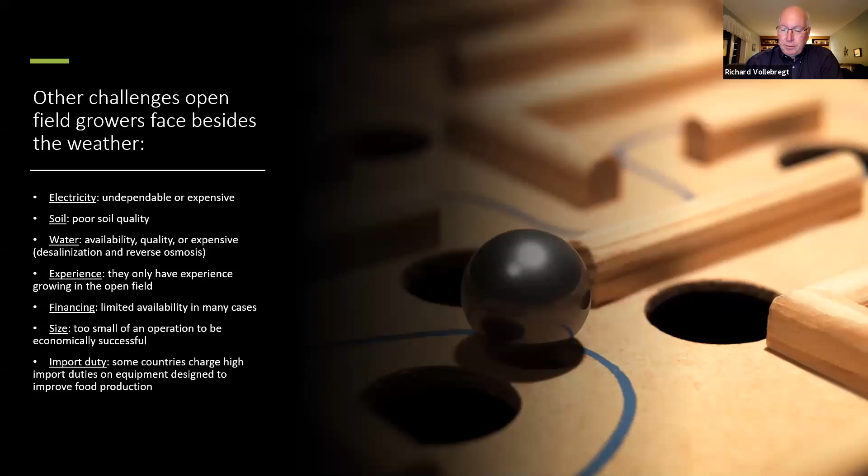Import duty. Some countries charge high import duties on equipment designed to improve food production, and this is a major issue in countries like India, for example, where the growers are looking for technology to improve food production, but their cost of importation is high, adding to the total capital investment and cash outlay.

So now we're going to talk a little bit about protected cultivation. And growers in warm and hot climates are utilizing many different types of production systems with some form of crop protection covering. So we're going to do a quick overview of the advantages and disadvantages of the various production systems using covers.

So when I think of net houses and I look at where they're installed, net houses are great for extending the season past what the open field can do, because they will protect the crops from the direct sunlight and keep the insects away. So if your normal open field harvest will be stopping in late February, for example, with a net house, you can extend the season into end of April, maybe early May. And you'll get an increased yield in terms of the number of fruit, but your pack out will go up.

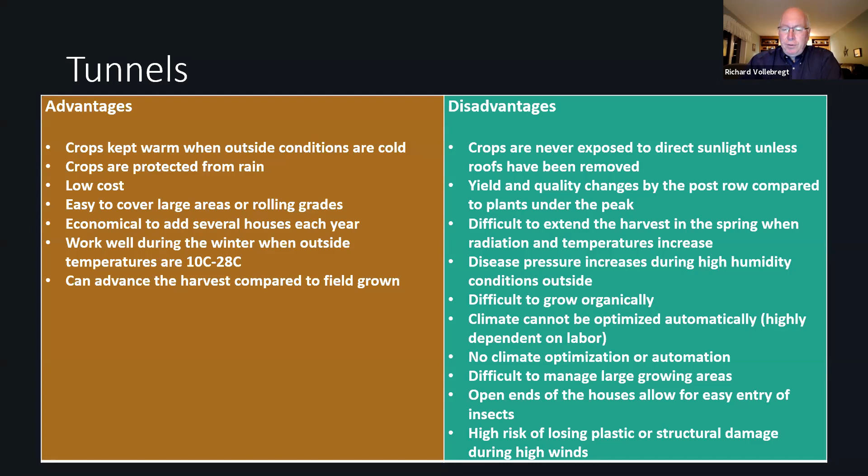So the next one is a naturally ventilated greenhouse. And in some countries, they refer to them as gutter-connected greenhouses. In other places, they refer to them as multi-span. But the key is that you're creating openings in the roof to allow for air exchange. And again, there's a set of advantages and disadvantages.

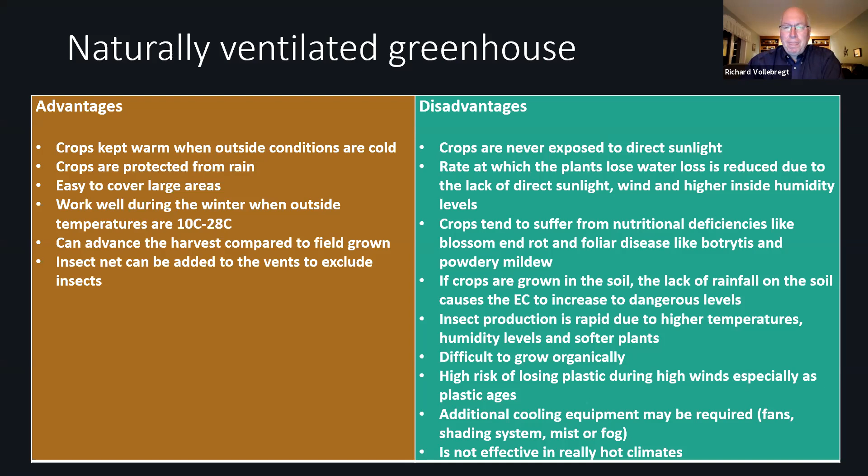So with a naturally ventilated greenhouse, they're effective for helping the production in the wintertime if you're in a high radiation zone. But again, their limiting factor is they're very difficult to cool in a hot, sunny climate. And so when people try a naturally ventilated greenhouse, they find they quickly have to add shading systems, misting systems, or things like that to further try to cool the greenhouse. And so a naturally ventilated greenhouse is really designed to make it warmer. But if you're already in a warm climate, you're making warm conditions now hot, and hot conditions really hot.

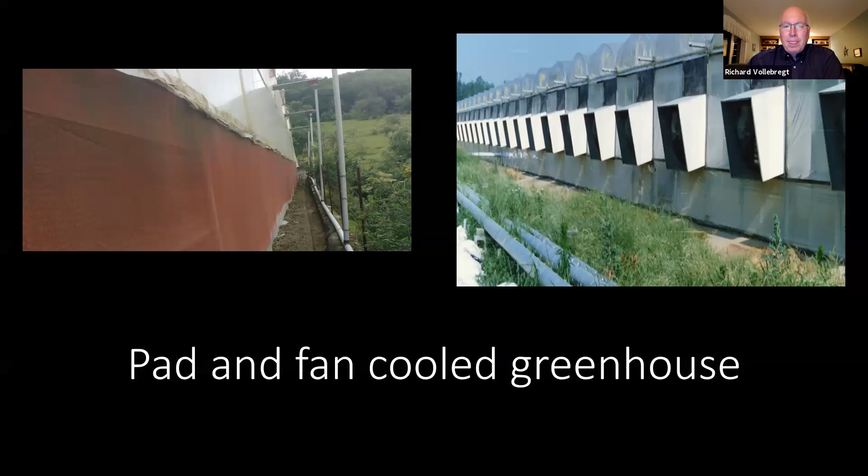So to try to cool, growers are using pad and fan cooled greenhouses. Fans on one end, cooling pads on the other. And again, they come with their own set of advantages and disadvantages.

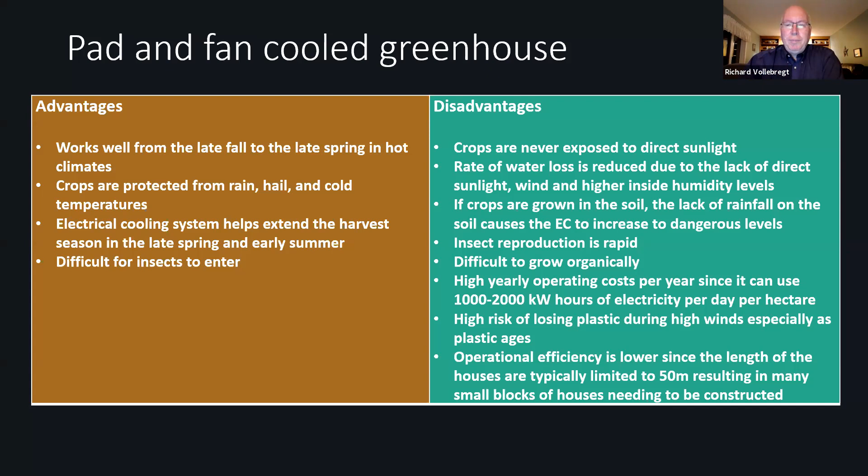So one of the biggest challenges with pad and fan greenhouses is that they use a lot of water and a lot of electricity for cooling. And so when you're in a hot climate, a pad and fan greenhouse will have the clear roof make it warmer, and now you're using more water and more electricity to cool. And one of the big problems is you're limited to 50 meters approximately from fan to cooling pad, which means you have to build many blocks of small houses.

So what are the key learnings about the conventional production systems? Each has many advantages and disadvantages. It's impossible to prevent all the problems. There's many causes of reduction in revenues and many causes of increases in operating costs. The management of the business becomes more difficult as it expands because all the disadvantages equal problems. And so the more disadvantages you have, if you have a small operation, you have many problems that are small, but if you have a big operation, you have many problems that just became big.

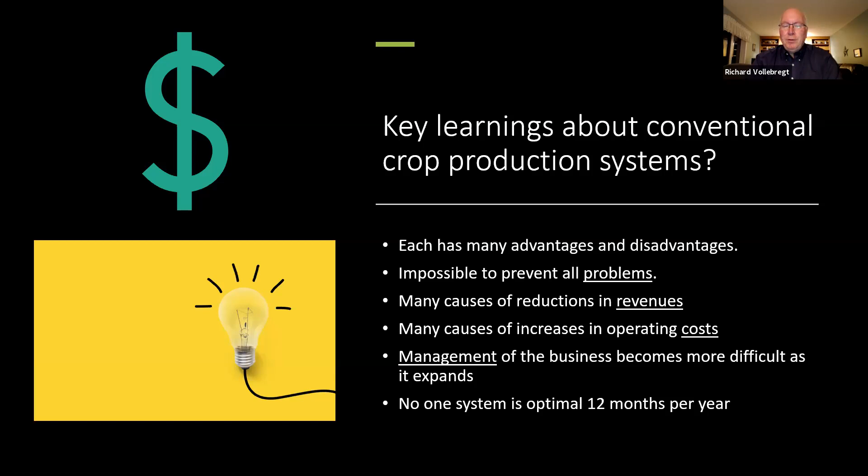And no one system is optimal 12 months a year. So open field is great in the winter. Net houses may be great in the spring, but don't work in the summer. Naturally ventilated don't work in the summer. Pad and fan doesn't work in high humidity. So each of them have a set of challenges. So how would our businesses be impacted if we could unlock the benefits of the open field and protected environments?

The words we use impact how we think. What words come to mind when I say the word greenhouse? Here's a list of the words that come to mind when I think of greenhouse.

What words come to mind when I say automatic retractable field or orchard covering system? Do the same words still apply to automatic field and orchard covering system? So I'm going to give you an overview of what automatic field and orchard covering systems are, so that we can then understand how to apply them as we develop our strategies for our businesses.

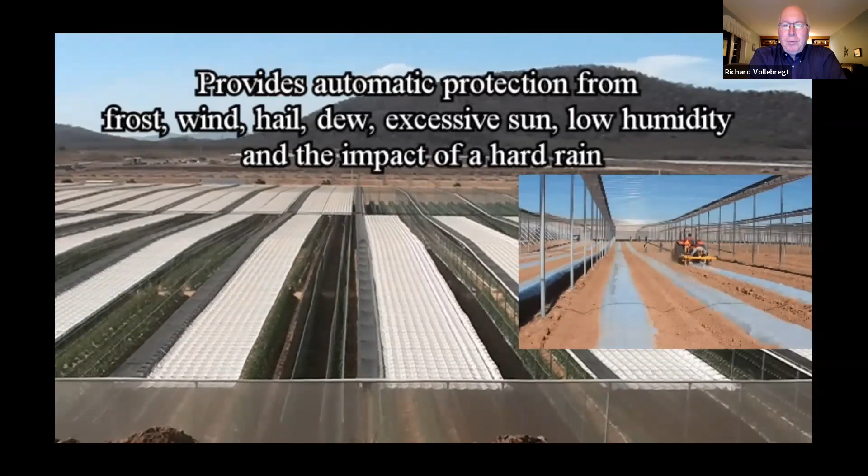So here you're looking at a retractable flat roof house, and one motor can close and open 9,000 square meters in only 6 minutes. And when you see the tractor there, do you think of a greenhouse or do you think of a field? And we'll provide protection against frost, wind, hail, excessive dry conditions, and the impact of rain, and we can keep the plants dry. So when you look at the scale of some of these places, you don't think of the word greenhouse, you think of a field with a covering system.

And these types of roofs only use 1 to 3 kilowatt hours of electricity per day per hectare, in comparison to almost 1,000 under pad and fan. And here you can see 17 hectares under one roof, and it's ideal for crops like blueberries. You could grow premium or off-season tree fruits like pomegranate, avocado, cherry, mango, papaya. Or use it for season extension of field vegetables. And you will reduce your water usage 50 to 75% per harvested kilo compared to the open field.

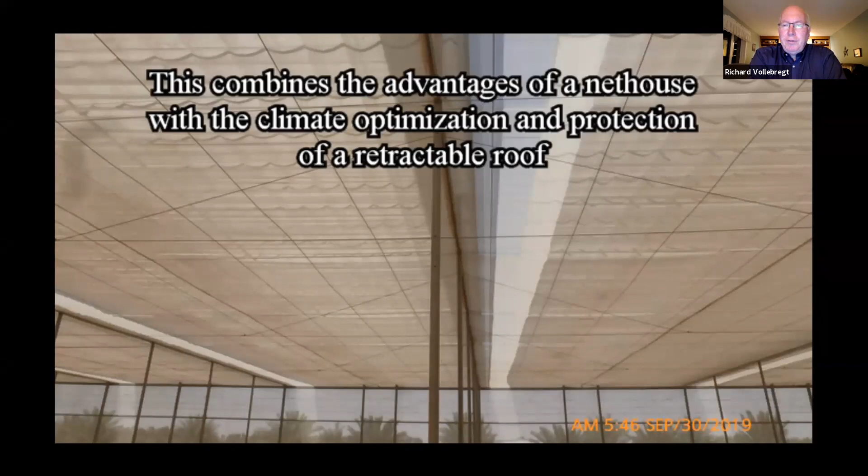And if insect pressure is high, install insect net below the retractable cooling roof. And now you're combining the advantage of a net house with the climate optimization and protection of a retractable roof. But when crops must be protected from the rain, a peak roof is required. So the rain will drain into a gutter, so the area is kept dry. And one motor can open almost half a hectare or over 1 acre in around 2 minutes. So here you can see a large installation of a peaked roof X-frame house over strawberries.

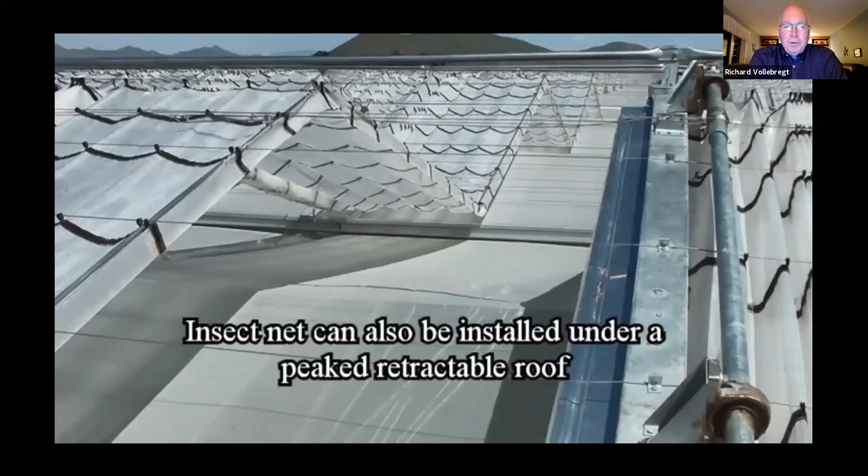And one of the big advantages is that you can grow on land that is not flat. So in many countries, excavation is expensive or difficult. And so here you can cover rolling grades without having to move land, which also preserves the soil quality, because anytime you excavate, you disturb the soil. You can also install insect net under a peaked retractable roof. So again, you're combining the advantages of a net house with rain protection and climate optimization.

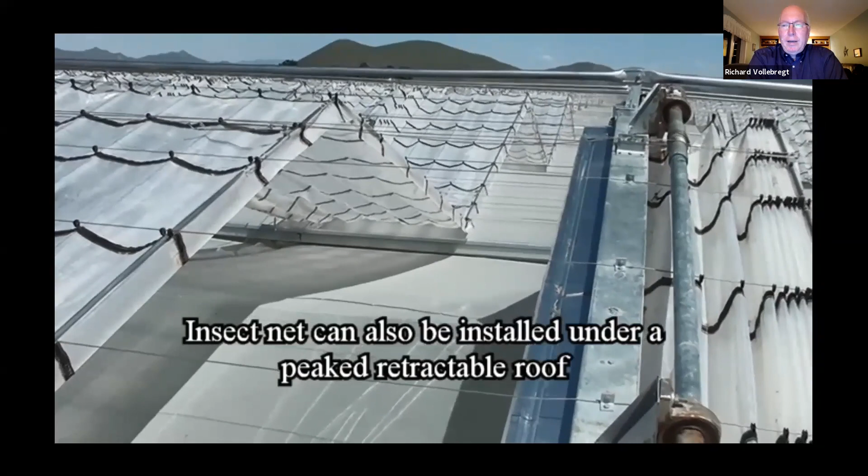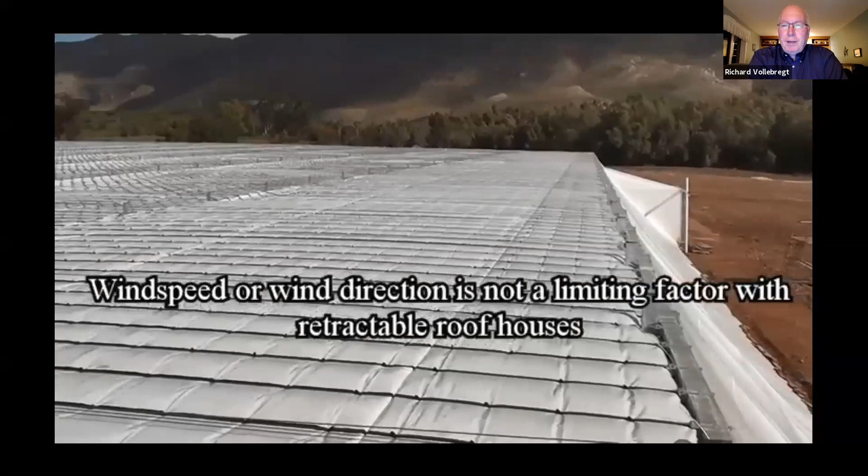And if you're in a hot, dry location, a low pressure misting system or fog will really help through the hot, dry times. And that misting system will operate just a couple hours a day. Now, wind speed or wind direction is not a limiting factor with retractable roofs. And in over 35 years, we've never had a roof blow off. So this allows you to think about locations where you may be susceptible to a typhoon, cyclone, or hurricane.

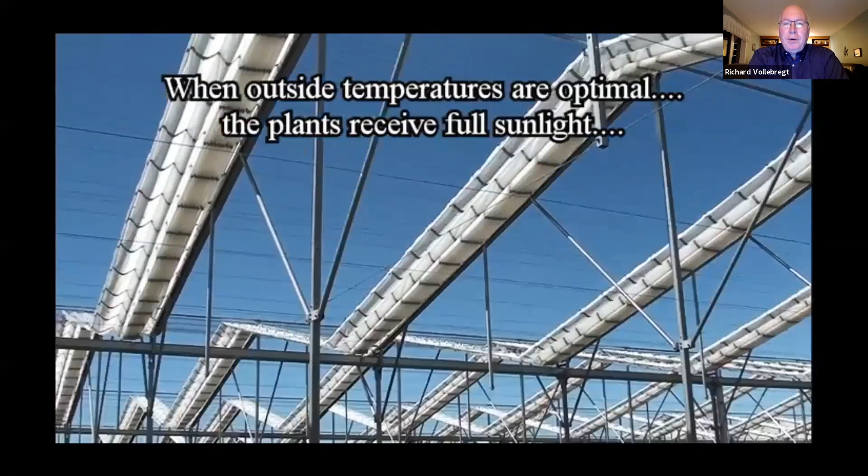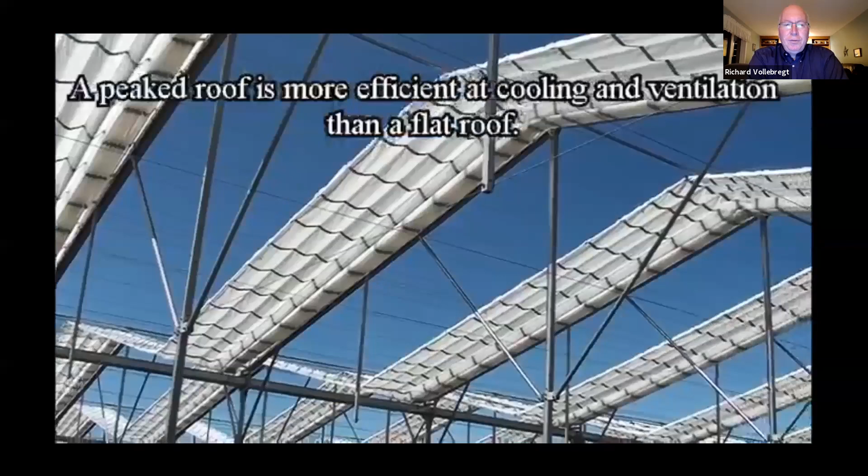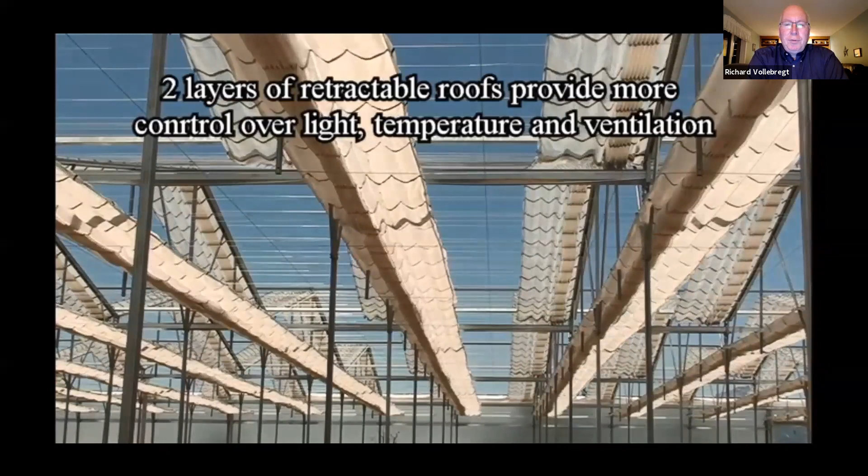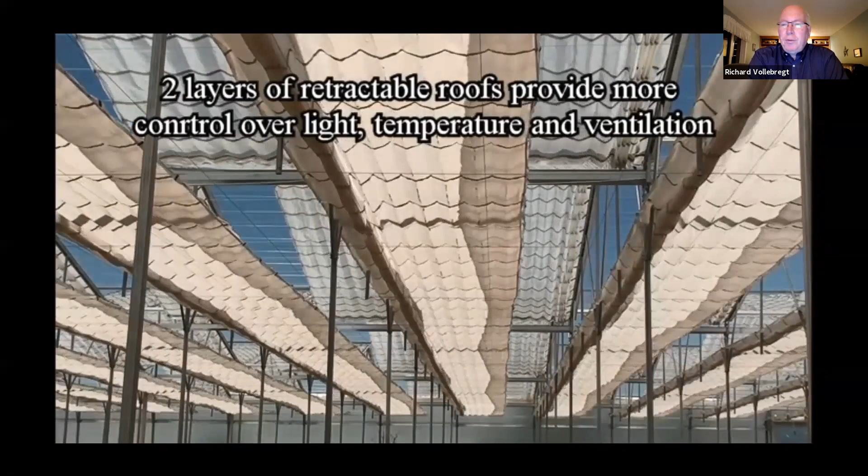Now here you can see two roofs closing in opposite directions. The top roof is a clear greenhouse roof. The bottom one is a white cooling curtain. And if you close them both all the way, of course, now you have an energy curtain inside for additional heat retention. And when you close this roof partway like this, if you stop everything right there, you've got the most efficient ventilation with no direct sunlight, no excessive shading, and lots of air exchange.

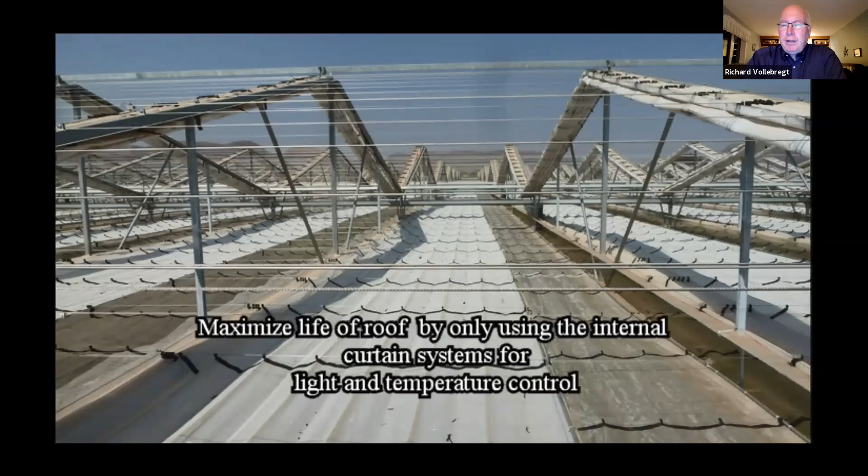And for specialty applications, people are using 3 layers: a clear roof, a white cooling roof, and retractable insect net. And to maximize the life of the roof covering, it's recommended to use the internal curtain systems for light and temperature control. And for crops that are day length sensitive, you can add a blackout system underneath.

So now let's compare what words we used with the word greenhouse to the key concepts about automatic retractable field and orchard covering systems. So on the left are the words that we used to associate with greenhouse, and on the right are the ones that would be connected to the concept of an automatic retractable covering system.

So the key difference is the field covering system starts with the concept of a field and then figures out what levels of protection are required. And it tends to be more large scale, and it would be at a lower cost than some of the other high-tech greenhouses.

When we use a white roof covering, we refer to it as a cooling house. So a greenhouse to us is something that has a clear roof to build up temperatures when it's cold outside, but a cooling roof is designed to cool the plants when the roof is closed.

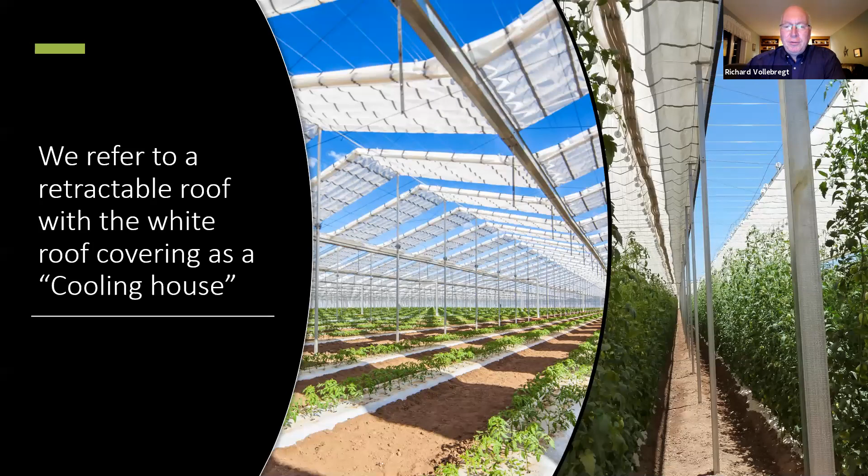So how do we use this tool to maximize our profitability? Besides protecting the plants from extreme weather, we also want to optimize the growing environment. But what does that mean? So I'm going to show you the impact of insect net and a retractable cooling roof on leaf and soil temperatures. And this video was taken at our demonstration and training center in Culiacan, Mexico in February. So it's not even hot yet.

We're at latitude 24 north, 10 kilometers from the Pacific Ocean, which means the latitude is similar to Riyadh, Saudi Arabia, Indore, India, Mooketsi, South Africa, Miami, Florida, and Bundaberg, Australia. And that was really why we selected Culiacan, because the latitude is the most popular latitude worldwide for growing vegetables in the winter. And all those regions would love to extend their season from the winter to the summer.

It is February the 20th, and we're in Culiacan, Mexico, and we are in a retractable flat roof house. And what we're going to do is check the impact of the insect net on the sidewalls on the soil temperature and compare that to the soil temperature under the retractable roof and in direct sunlight. So it is now 12:30 in the afternoon, and when we look at the soil temperature here under the insect net, we can see that it's 56 or 57 degrees under the insect net.

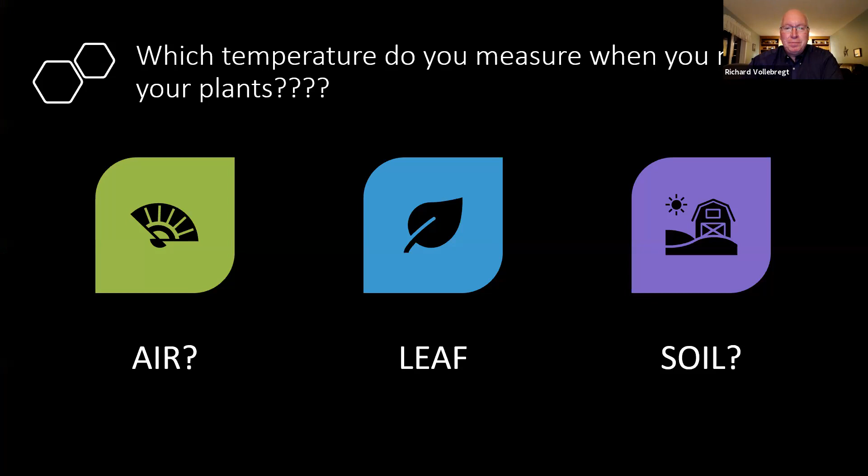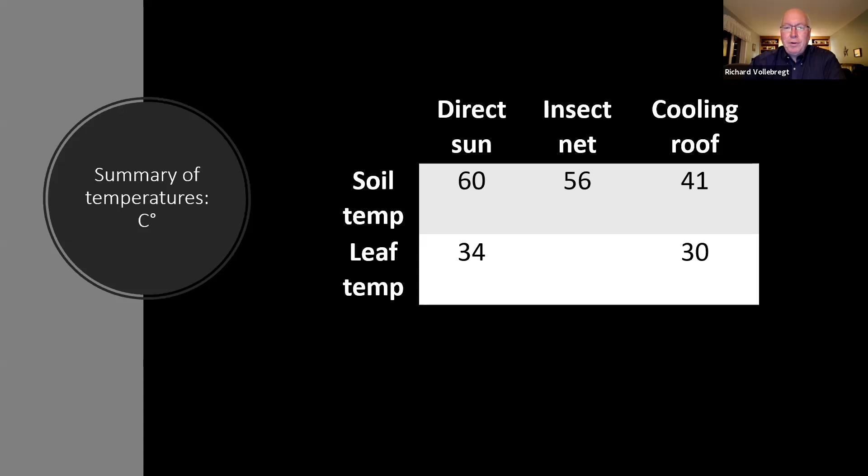So my question to you is, which temperature do you measure when you manage your plants? Are you measuring air temperature, leaf temperature, or soil temperature? So here's a summary of the temperatures we just saw in the video. So the direct sun was 60 degrees Celsius, the cooling roof was 41. The leaf temperature went from 34 down to 30. So what do you think the air temperature was when I took this video?

I'm not sure, as I didn't measure it, because I believe that it's more important to manage the plant than the air, and that the leaf and soil temperature will tell me much more about the plant than the air temperature will. And a very favorite example I use is if you weren't feeling well and you went to the doctor and you said, hey, I'm not feeling well, can you check me out? And if he came to you and he measured the air temperature and he says, hey, it's 23 Celsius, you should be feeling fine. Well, the air temperature has no bearing on how your body is feeling.

And we could see that the root temperature and the leaf temperature is significantly different from the air temperature, and yet that's what everybody measures. So the plant is what we're managing, not the climate. So what guides us the most effectively is to look closely at how the plant is developing. So looking at the climate is interesting, and a lot of people will say, well, what's the temperature inside of a cooling house? I go, well, what's more important, what the air temperature is or how the plant is performing?

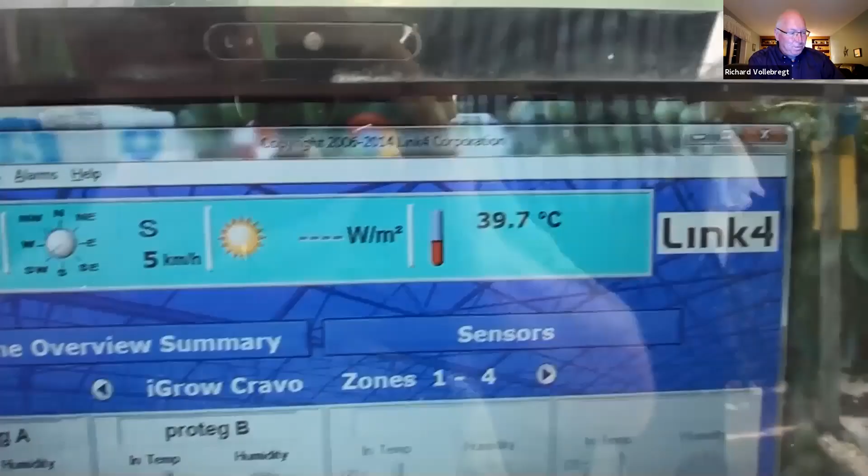It is 1 o'clock in the afternoon on June the 6th, 2015, and we are in the Cravo demonstration greenhouse in Culiacan. And we're just going to look at the temperature and humidity differences between the retractable roof without the insect net and the retractable roof with the insect net. So currently, the outdoor black plate temperature is 39 degrees. We have 5 km/h winds.

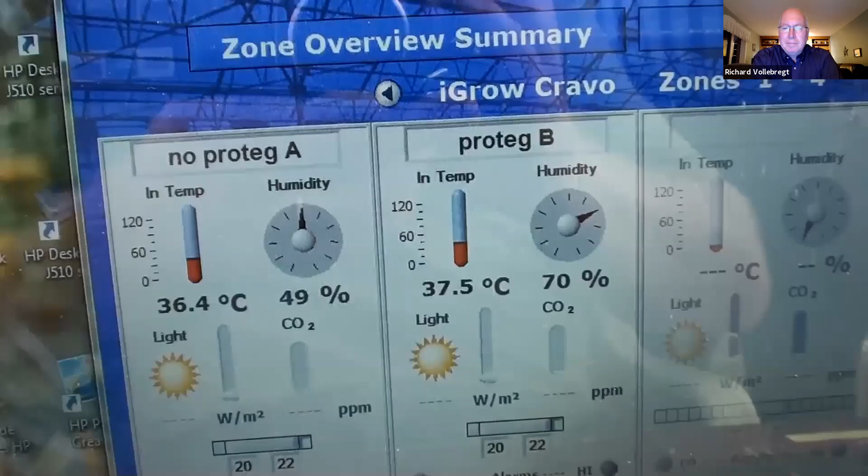And when we look at the temperature and humidity, right here is the side without the insect net, and we can see the air temperature is 36 degrees and the relative humidity is 49%. And over here is where we have the insect net, and the air temperature is only 1 degree higher, but the relative humidity went from 49 to 70%.

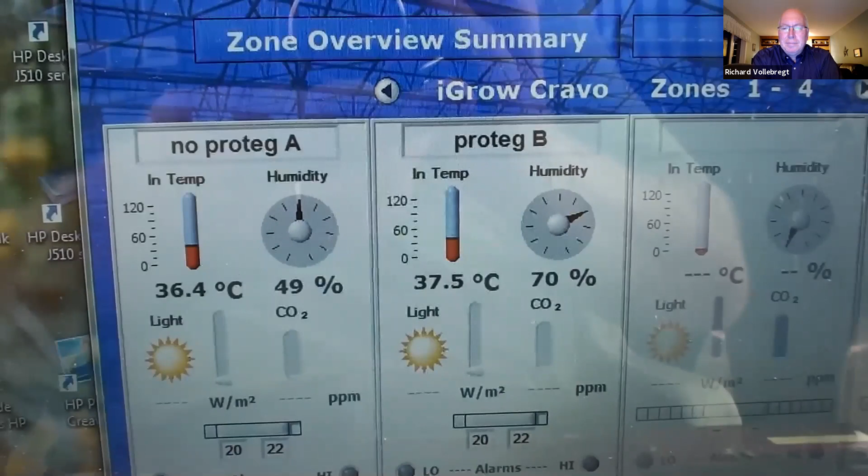So what we're learning from this is during the high heat and humidity conditions, the insect net is helping to trap more of the humidity, and the plants are definitely performing better right now under the insect net because of the fact that the air temperature is similar, but the higher relative humidity is lowering the transpiration rate.

Over here, without the insect net, we're running into a much lower humidity, and so to compensate, it would be ideal to add a misting system so that we can boost the humidity and help lower the air temperatures.

And the cell wall thickness, or the thickness of the fruit, was 13 to 21% heavier in retractable, which means there was more kilos of fruit per box, which makes transportation more efficient if you're shipping long distances. The fruit was 40% firmer, which is equal to shelf life. And the fruit in the net house dehydrated 30 to 35% more after 15 days of post-harvest storage. And so not only is there a difference in the quantity of fruit, but changing the environment changed the quality of the fruit.

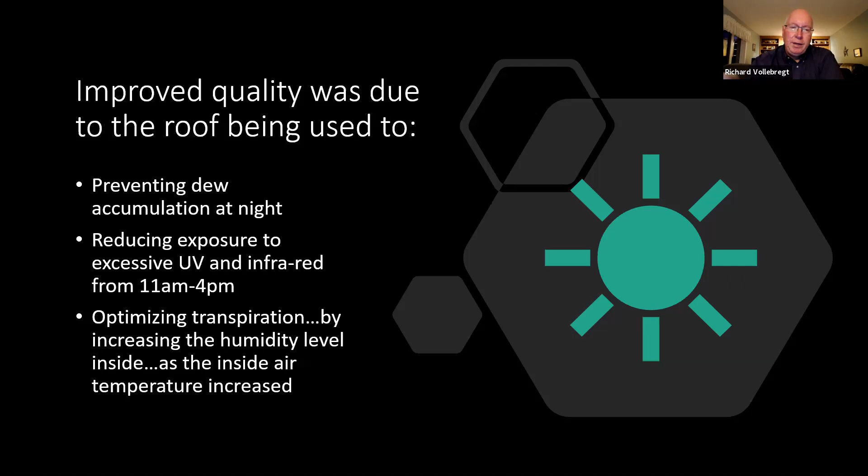The roof was closed in the cooling roof between 11 and 4 to block the UV and infrared, which was now reducing the transpiration rate, reducing the fruit temperature. And we were now optimizing the transpiration rate of the plant by increasing the humidity level inside as the inside air temperature increased. So as we went from 30 to 35 to 38 degrees, we would continue to increase the humidity levels in order to reduce the transpiration rate.

And the second one is managing humidity does not equal managing transpiration. So again, are we managing the climate or are we managing the plant? So let's talk a little bit about the plant management strategy. If the plant temperature is too cold, we want to increase it by closing a roof. If it's too hot, we want to reduce it by closing the roof.

If the plants are not losing enough water, we want to make them lose more water by retracting the roof. And if the plants are losing too much water, we want to reduce the amount they are losing by closing the roof. So if you think about it very simply, if the temperatures are between, say, 17 Celsius and 28 outside, you have perfect conditions outside. And so the plants are grown in the natural outdoors to realize the benefits of outdoors.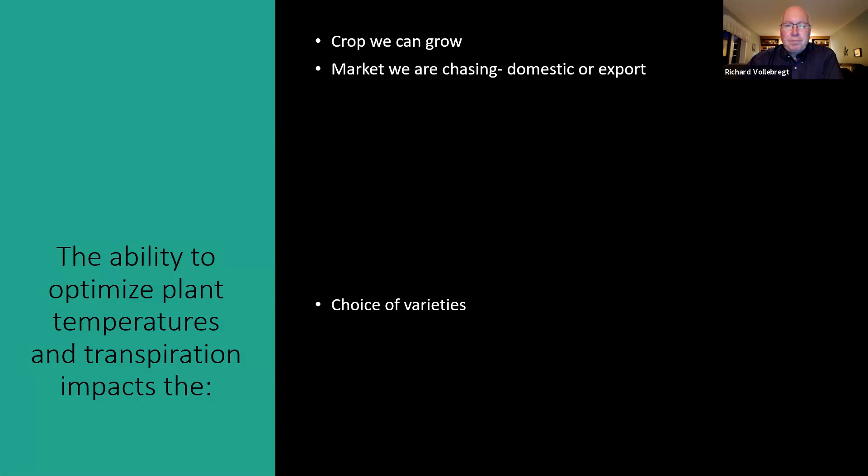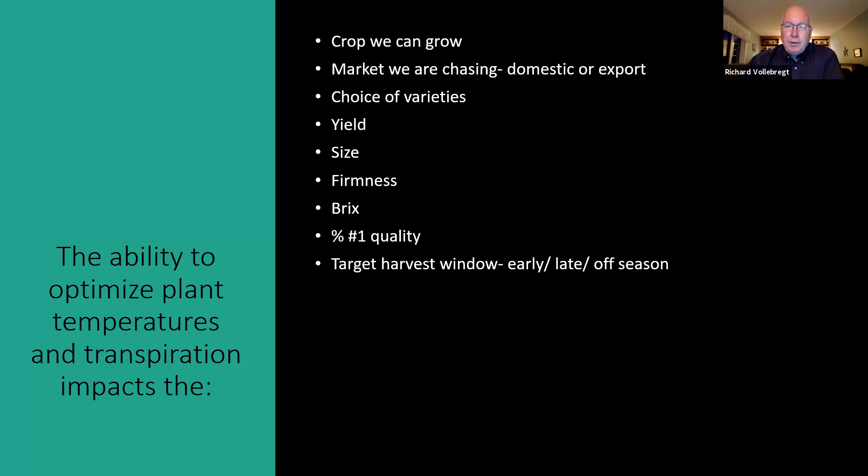The ability to optimize the plant temperatures and transpiration impacts on what crop we can grow, which market are we chasing, domestic or export? The choice of varieties. Our yield, the fruit size, the firmness, the Brix, the percent number one quality, our target harvest window. Are we trying to go early, late, or off season?

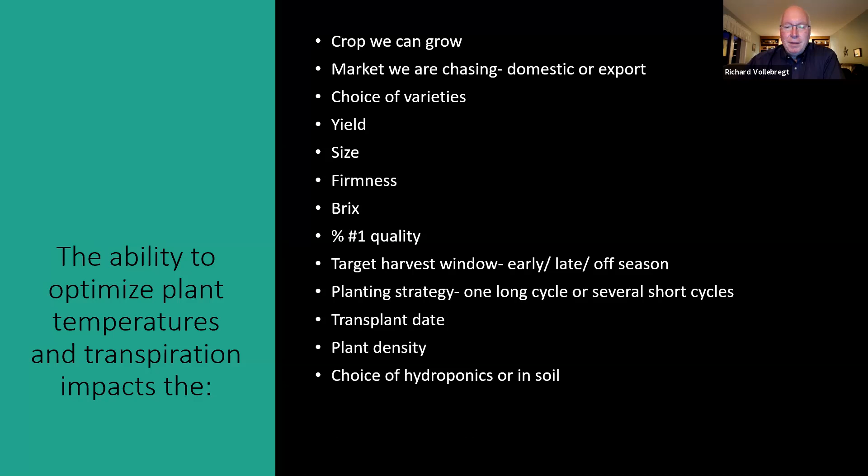Our planting strategy, one long cycle or several short cycles. Our transplant date, our plant density, our choice of hydroponics or soil, which together determines our overall profitability and return on investment. So the strategy to long-term financial success is to invest appropriately to ensure a reasonable ROI can be achieved.

So you have different options. You have to figure out what is the appropriate investment. To ensure you get the highest prices, are you going for premium quality or off-season? We need more number one quality and we need bigger fruit.

To ensure that our yearly operating costs are minimized, we don't want to use a lot of electricity, we don't want a lot of water for cooling, and we want to reduce the amount of labor required to operate the houses. To make the business easy to manage, we want quick reaction to changes in the weather or market conditions. To increase the focus on strategies to prevent problems rather than treat the symptoms. I like to refer to this as fire prevention rather than firefighting.

We want easy automation because we don't want the management to become excessively complicated as the business grows. To maximize the long-term viability of the business, we have to minimize the risk of a major crop loss due to frost, wind, hail, dust, or excessive heat. Minimize the risk of damage from hail or winds. Be adaptable to grow different kinds of crops and build the business so that it can be acquired. And the more of these strategies we can implement in our plan, the greater the probability of financial success.

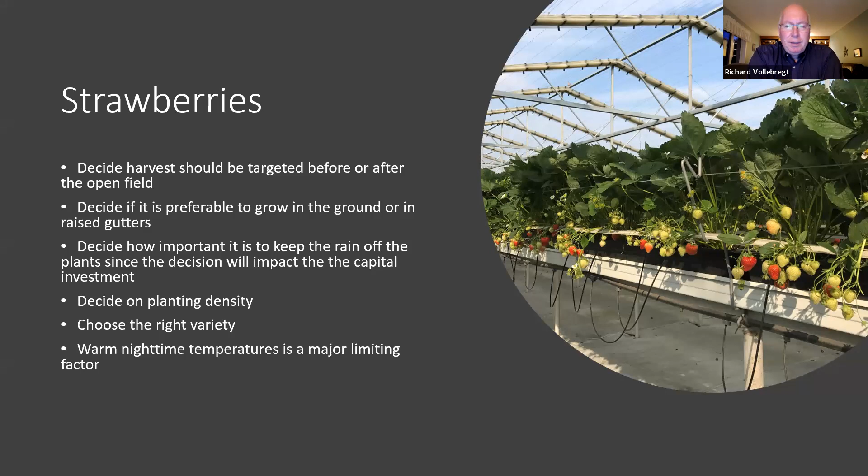Decide on planting density, choose the right variety, and the major limiting factor on strawberries is your nighttime temperature. So we can regulate daytime temperature by using a roof and a misting system. But if your nighttime temperature is 30 degrees, unless you have a way of reducing it, that will become the limiting factor on how the strawberries will perform. So you'd use a cooling roof to target fall production. So here on the right, you can see a white cooling roof, and on the left, they have a clear greenhouse roof. So they're growing strawberries in raised beds here, and here we have it in raised gutters.

And so in places like the US, for example, or Australia, the highest prices are in the fall because it's the hardest to grow. So California is dropping off production in the fall, and Mexico hasn't ramped up yet. And Florida is limited on when it can transplant because the temperatures in June, July, August are very high. The soil temperatures will be extremely high in the open field. So they have to delay when they transplant until temperatures go down, which means their first harvest is coming in close to Christmas. By using a cooling roof, they could now transplant weeks earlier to target the fall.

This particular operation on the top right is in Australia, and they actually were transplanting in the late winter, grew the plants through the hot summer, kept them in good condition through the hot summer so that they had a strong yield coming into the fall, which is when their prices are the best.

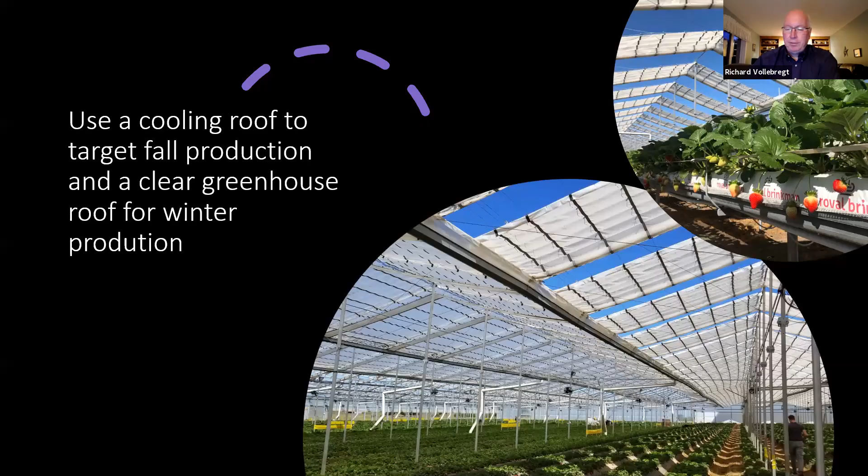For blueberries, it's difficult to advance the harvest. It's easier to extend it. What we do there is we would benchmark the current production system. So if you're growing in tunnels, for example, what's your plant density? What's your yield per plant per year? What's your capital investment per hectare? Your fixed production cost per hectare, and your variable production cost for picking, packing, and transport.

So then we would create the retractable roof production system. And we would say, well, based on our understanding of how the plant development changed, we could potentially change our plant density. We can look at yield per plant. What's the capital investment? What's our fixed production cost per hectare? We would look at what's the average selling price and then determine the premium for increased size or delayed harvest.

So to give an example on the change in development in a blueberry plant, this was a trial done in Mexico. This is the variety Biloxi. The crop on the left was grown in a retractable roof using organic fertilizer. The one in the middle was under a tunnel with organic fertilizer, and the one on the right was retractable with conventional fertilizer. And you can see there's a completely different structure to the plant here.

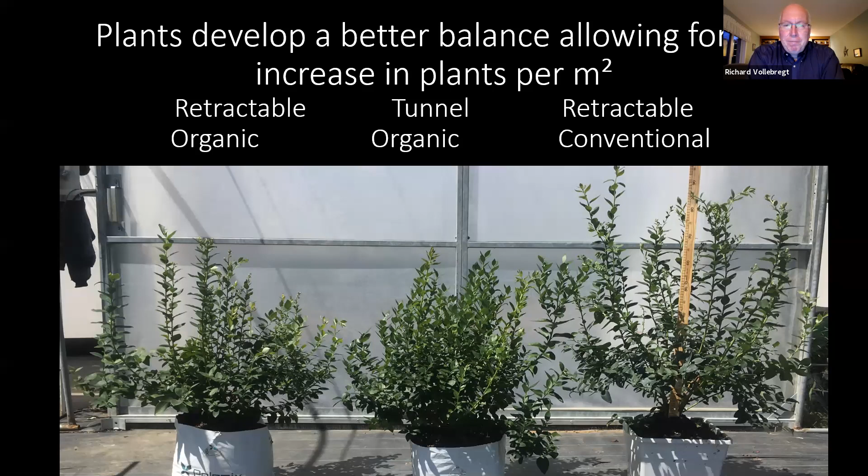And the one on the right is comparing the difference between retractable with conventional fertilizer and retractable with organic fertilizer. So we have two variables going on: what is the growing environment and what is the fertilizer? So these factors can allow you to look at almost a doubling of the yield per square meter because you're getting larger fruit size, you're getting more fruit. So better plant balance, larger fruit size, and it's easier to extend the production into the heat because you have the ability to cool properly.

When we look at high-value tree fruits, we have to decide, are we covering an existing orchard or covering a new one? Determine whether you will achieve a better price if you harvest earlier or later. We would then benchmark what is the best, average, and worst yields over the last several years. So you already know what you're achieving. So that's the starting point. Determine the best, average, and worst pack out. So what you harvest and what you ship, the difference is how many are number one quality.

If you're covering a new orchard, we would look at what variety, which rootstock, what planting density, and what pruning system. And that would be done in conjunction with the genetic suppliers and the growing consultants who understand how the plants are responding in that particular growing environment. And then create a potential model.

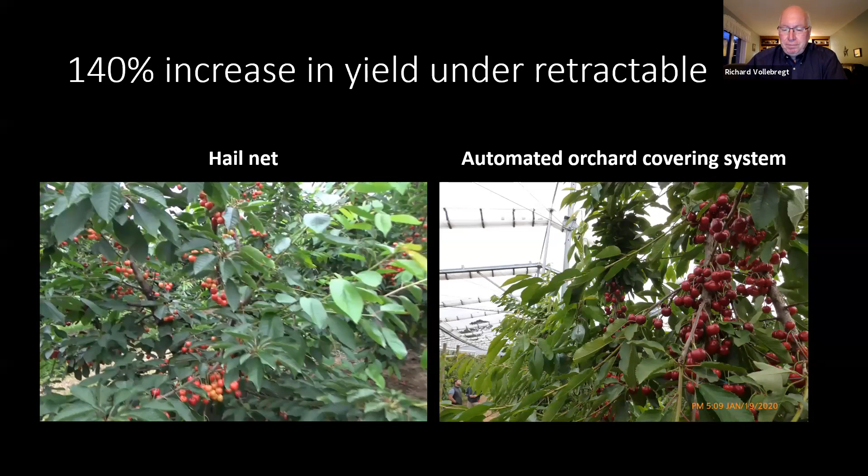This year down in Australia, in a trial between hail net and the automated covering system, there was a 140% increase in yield under the retractable. And of course, in a crop like a mango or cherry, you get one harvest a year. So it better be a good one. And one of the most amazing parts is they really increase fruit size. So the cherries on the right, they actually look like mini apples. And that's essentially due to climate optimization.

Strategy for vine crops. Decide if you're targeting the premium quality or the good quality market. Decide if you want to optimize field growing or to go higher tech with hydroponics. Target the harvest window; the target harvest period will determine whether it's better to grow one long cycle or two short cycles, or in the case of cucumbers, 3 cycles. It's always difficult to plant earlier in the summer due to the pollination challenges. It's easier to do a planting in the winter to have a strong plant going into the summer.

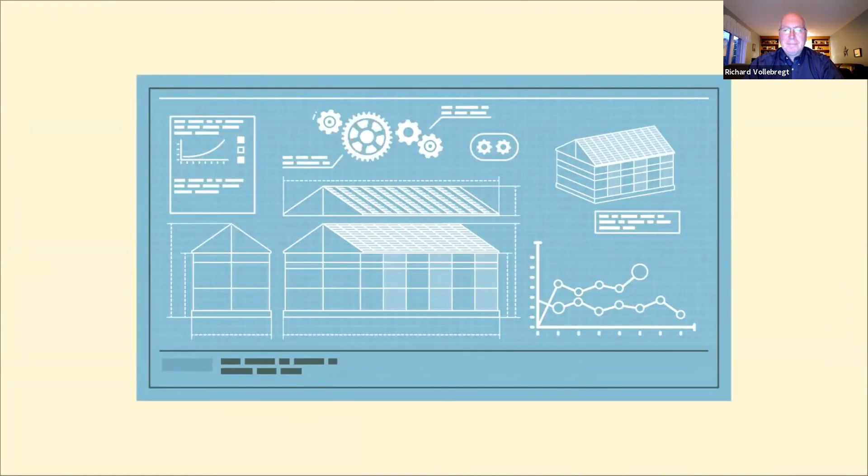Okay, now for those of you that really want to understand more about the production system itself, if you go here to the Over science... the last 35 years, Cravo retractable roof houses have been installed on 6 continents.

Okay, if you go back here to the science behind the retractable roof production system, you will find a series of 6 videos that I created that basically go through in detail the overview of the production system, looking at plant temperature, focusing on water loss or transpiration, looking at water stress, the difference between a Cravo house and a conventional greenhouse, and automating the retractable roof and walls.

It takes approximately 1 hour to watch all 6 videos, and I think you'll find it gives you a really good background. It goes much deeper than what we can do in a webinar here.

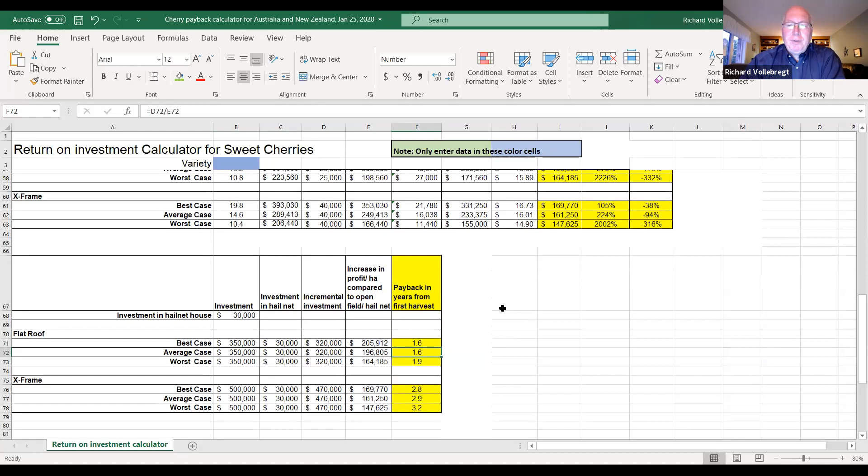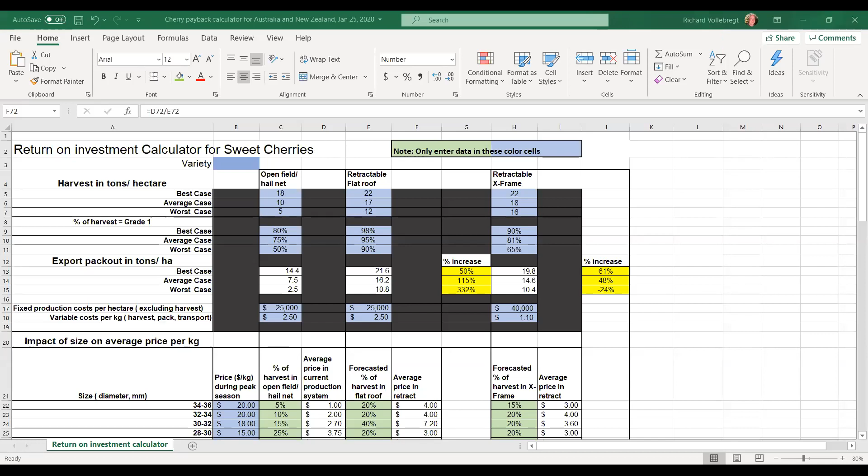Excuse me, I'm seeing the sweet cherry sheet. Oh, sorry. Then I'm going to have to reshare. Sorry. Thanks for letting me know.

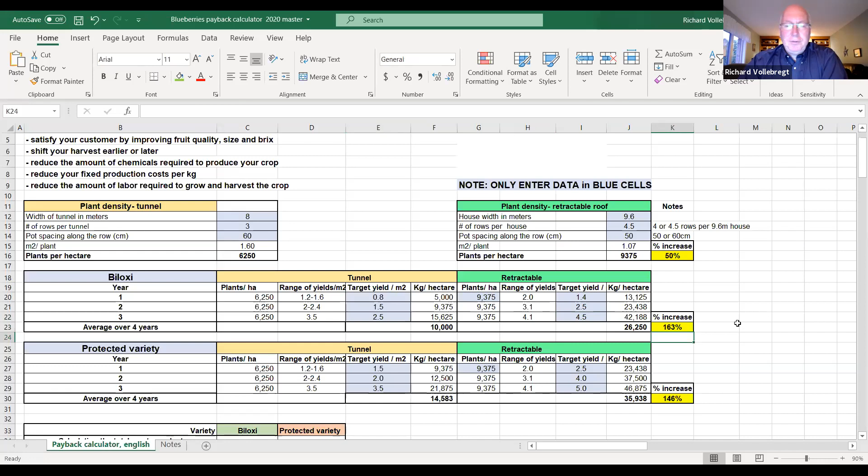We would then analyze what is the cost per plant, what is the cost for the pot, what is the cost for the substrate, because if I'm spending $9.50 per plant, and I have 6,000 plants per hectare or 9,000 plants per hectare, that's going to change my investment for plants, pot, and substrate. So then I look at what is the material cost of the house. So if I'm growing under a tunnel, I've got a price for the materials, a price for installation, which is the total cost. And then I've got 150,000, for example, on the flat roof, 30,000 for installation for a total cost. I have to look at my hydroponic system, my ground cover to understand my total capex.

And this is where it gets really interesting, because an initial look would say, well, if I'm used to spending $47,000 for the tunnel, and a flat roof is 200,000, that's a lot of extra money. How am I ever going to pay for that? And my total capex, though, by the time I take my plants plus my structure, I'm at 106 versus 294. So you can see that's almost triple the investment. And now I have to look at what's my yield per hectare. So here I went from 10,000 to 26,000 per hectare.

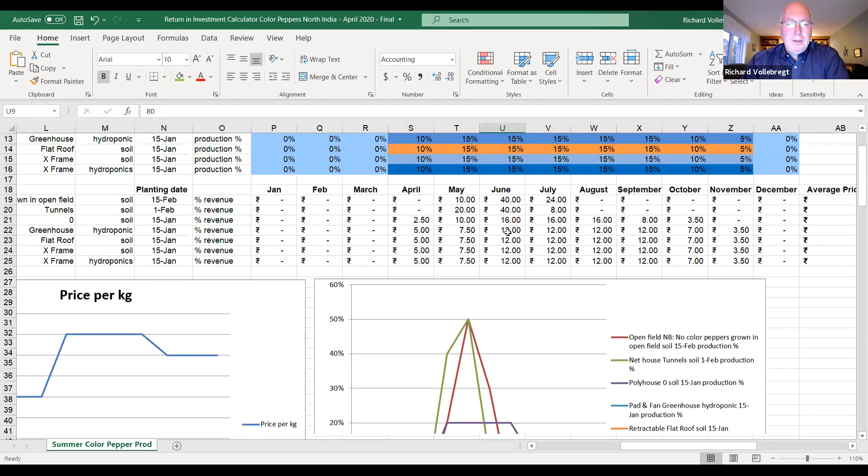So this is the price curve of colored peppers in India. So obviously you want to be targeting the highest price window. Now when we look over here, this is the production curve. So this is the percent of production that's coming in a certain month. So if I'm in the open field or a net house, I've got a really high peak over several months, which basically says I'm supplying at the same time as everybody else.

If my retailer wants me to be in the business longer, I need to figure out how to stretch this curve, because I don't want to be just supplying the retailer for 3 months, because then I'm not special to him. I want to be special to the retailer because I need him during this time and he needs me during this time. So by building your business model, understanding the need of the retailer and the market price, you can develop a strategy of how to manage your operating costs and maximize your revenue.

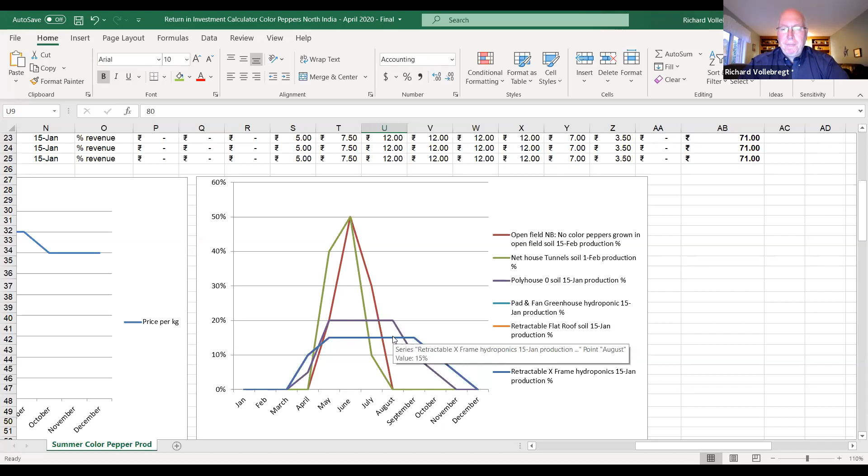And so this is an example that goes into pretty great detail, looking at all the different expenses you could be incurring, the revenues, the investments, the cash flow, the payback in years, the profit per kilo. So because we have people from over 30 countries on this webinar, this is just to give you an example of how we have 3 different financial models to target a tree fruit, a crop like a blueberry or strawberry that gives us an extended season but is day length dependent, or a vegetable crop.